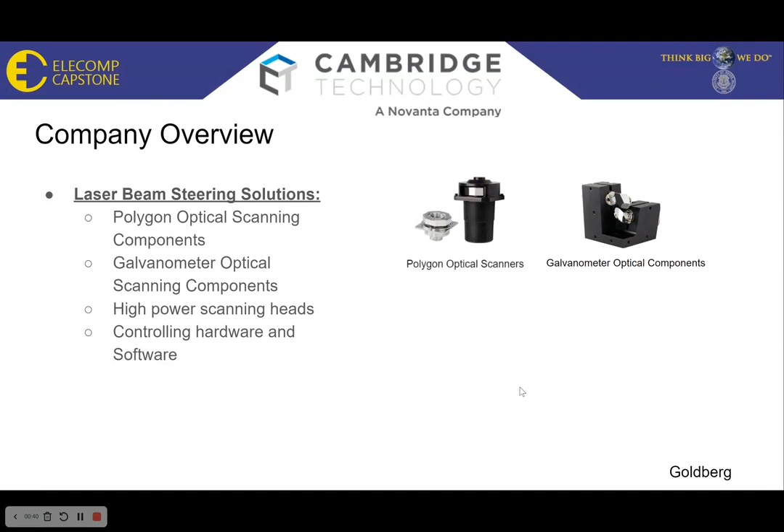Now, a little bit about Cambridge Technologies. Cambridge Technologies designs and manufactures cutting-edge laser beam steering solutions. These include polygon optical scanners, galvanometer optical components, high-powered scanning heads, and finally, controlling hardware and software.

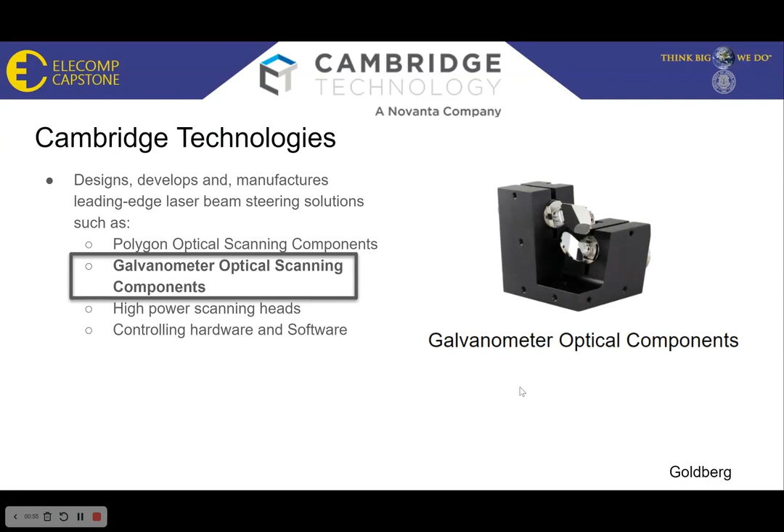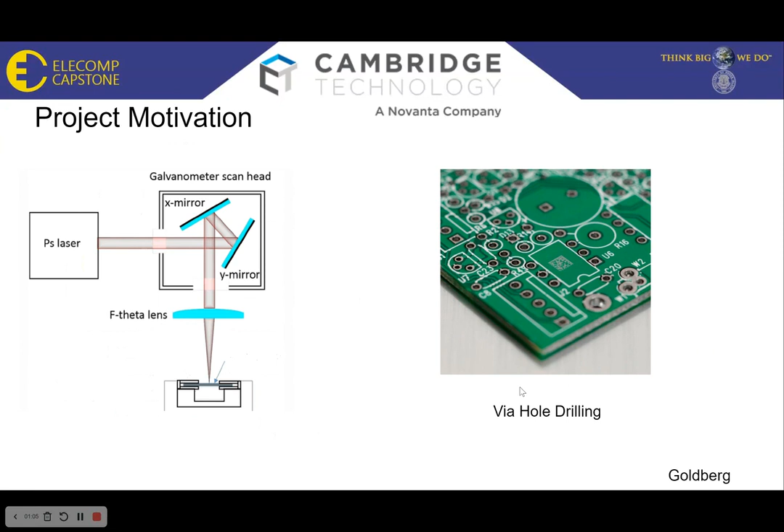Now, for our project specifically, we're going to be focused on Cambridge Technologies' highly engineered line of galvanometers. These galvanometers are built around a highly optimized moving magnet rotor, making Novanta the industry leader for these components. Now, these are some of the uses for high-powered galvanometers, such as via-hole drilling and high-speed marking and engraving.

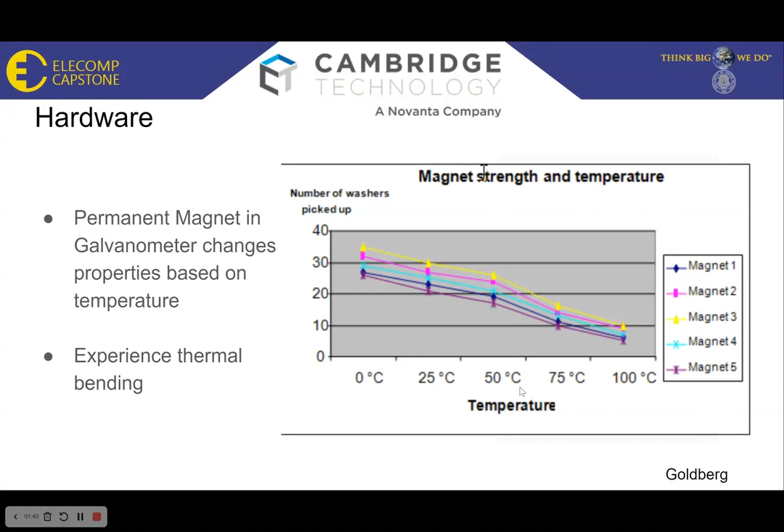Now, we know how a galvanometer works, but you might be wondering, how does this relate to our project? As we learned earlier, galvanometers rely on this magnetic field, specifically a permanent magnet, which begins to change properties at high temperatures. As Cambridge Technologies works on progressing their technology and making these galvanometers faster, temperature becomes a problem. For the hardware side of our project, we'll be making a complete test bench to ensure the quality of our magnet, using lasers to measure the tri-dimensional bending under high temperatures.

Okay, for our anticipated best outcome, this project has not been achieved, and the purpose for this outcome is that there will be two manufacturing operations, essentially a test measuring device and an input device that needs to be integrated into the MES system. The input device would upload the data into the electronic traveler so it can save the result from its procedure.

In addition to this outcome, it requires having the devices robust in a production environment, having the HMIs, or human machine interfaces, accessible through the MES UI environment with instructions and support for the operator, and it may require minimum user training to get used to the operation of the system.

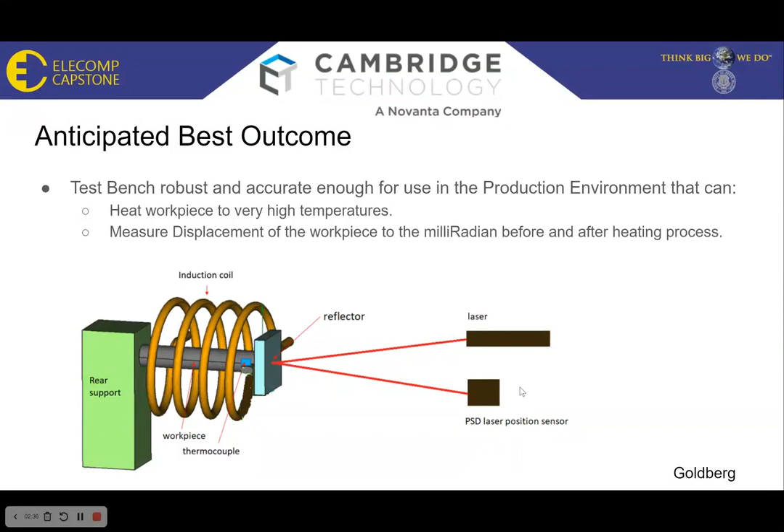This flowchart represents the operation of the testing structure. It starts with loading the workpiece. Once it is loaded, it needs to be aligned to the laser so the laser can be detected on a sensor to measure its X and Y position. Finally, the heating cycle will begin by heating the workpiece and then letting it cool off after gaining enough data.

And a sample time is a period to heat the workpiece so its temperature can reach the set point temperature of 100 degrees Celsius. Once the heating cycle is completed, the workpiece can be removed and its testing procedure is completed.

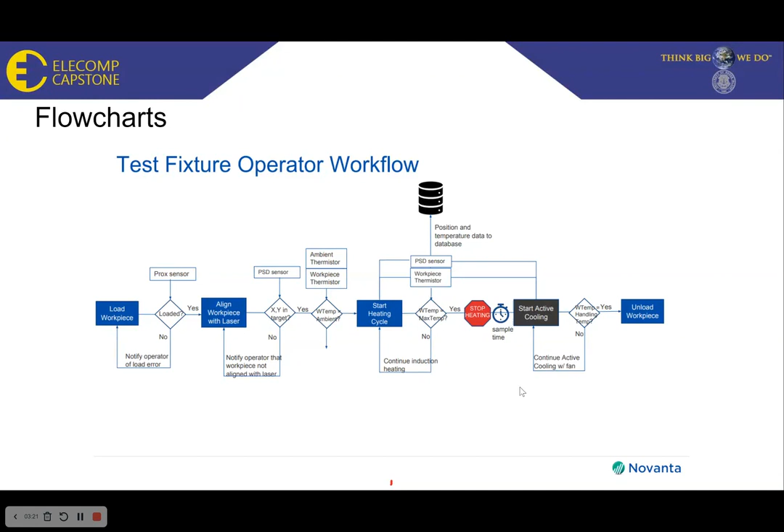To understand a little more of how the hardware works based on the flowchart we talked about earlier, the laser diode will emit the laser and a mirror is attached to the workpiece so it can reflect the laser, and the laser will travel to the PSD sensor to measure its position, and its data will be transmitted to the MES workstation.

The other device that is also connected to the workstation is a thermocouple, which will measure the workpiece temperature. With the temperature and the position data collected, it will be compiled to the database, and the induction heater will require a switch to control its power so the workpiece will not be overheated during the heating cycle.

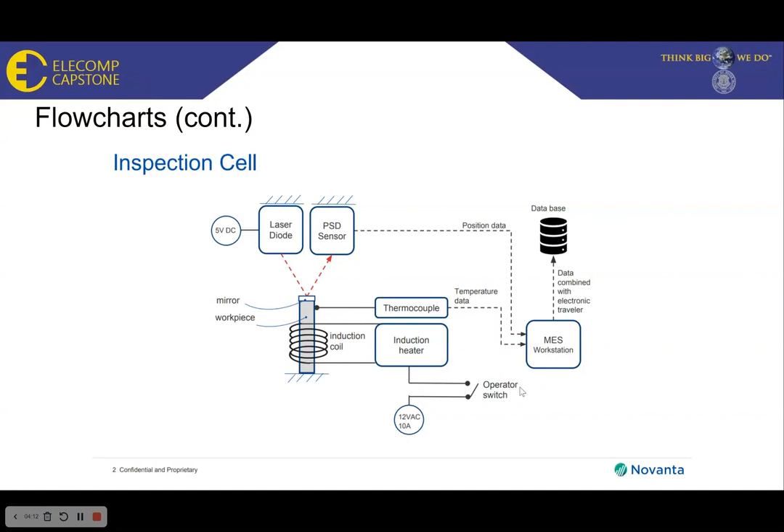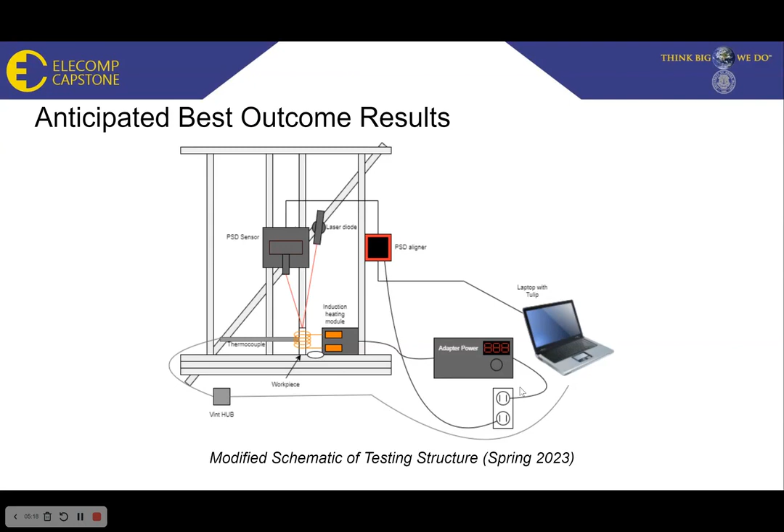The thermocouple is close to the heated workpiece so it can measure its temperature due to correlation when adding an insulator midway of the workpiece. The power adapter is the source of powering the induction heater, and it has a knob so it can adjust its voltage, well, it needs to be powered at its maximum for its fast heating rate. And the laptop itself contains the workstation, so it can use the Tulip program to upload the position and temperature data of the workpiece.

And finally, on these two images, we have a comparison of the testing structure we accomplished back in fall and later this spring. On the original structure, on the left, we built it with integration to only the PSD sensor and the laser diode. In the next image, we made more accomplishments to modify the structure, integrating other components so we could develop the heating cycle and measure its data on the workpiece.

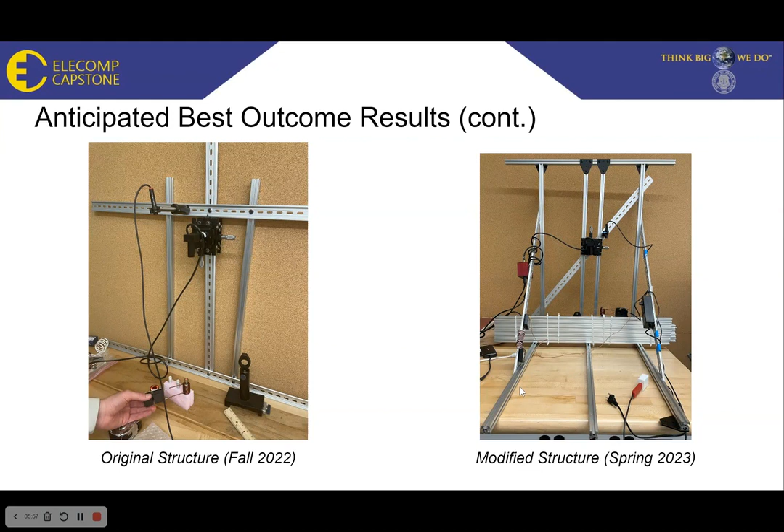So moving on to the software side, 80% of traditional manufacturing systems use paper trails to record data. We all know big stacks of paper can get out of control quickly. Not only is it unorganized, but there's no streamlined method to analyze our data and ensure the quality of our products is consistent.

So for the software side of this project, we will be building an intelligent manufacturing execution system to go along with our test bench. This will be designed to gain versatility and to organize, control, and monitor processes in an easy and accessible way. With an MES system, we are able to streamline all of our processes and data into a database and use this information to implement better quality control, in addition to opening the door to machine learning.

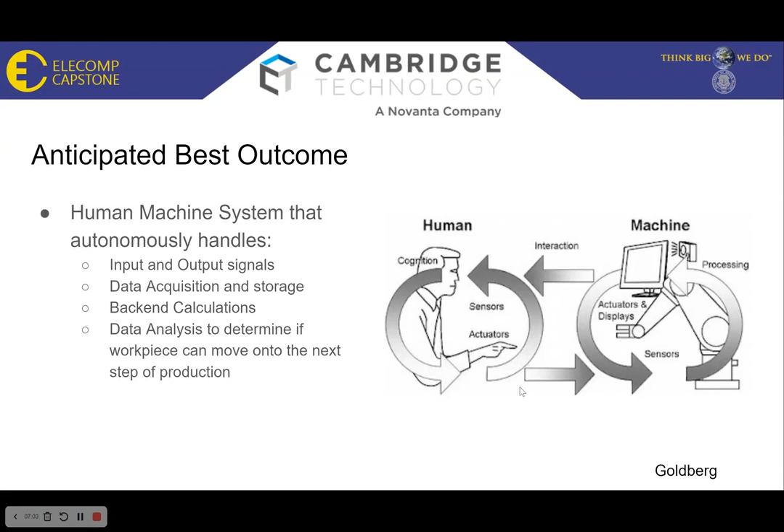So the first thing is the user will load the workpiece into the directed slot. We will be using the PSD sensor, which is just a positional sensor that tells you where a laser is. We will see if that's zeroed out to begin with, and then if it is, we will begin our heating process.

And throughout the heating process, we're taking data every second. We're taking our X position, Y position of data, and at the end, we'll be able to use all of these calculations to calculate different magnitudes and see how the position has changed over time.

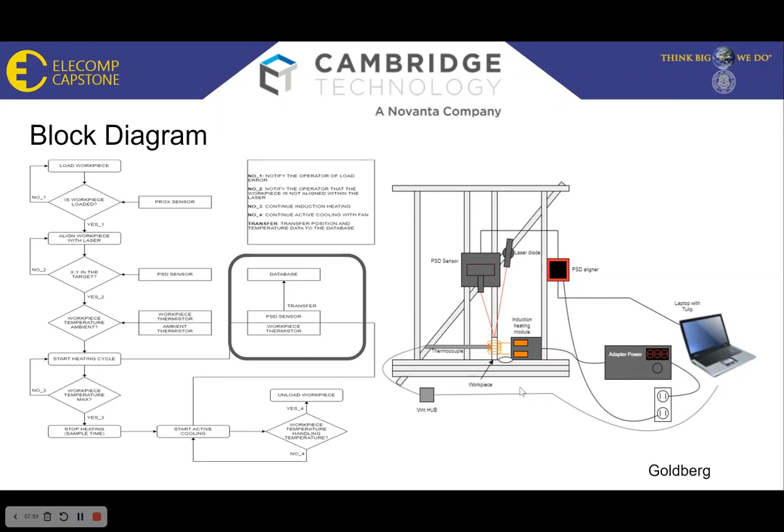And from there, we can make our calculations and upload them to a database, in addition to a user interface, as we'll see here. So for our project, we're trying to take this process and make it super automatic to allow an operator with minimal training to be able to operate it.

So once our user selects begin, all the necessary calculations will be done on the back end, eliminating the need for a technical background to operate this.

Another key feature that we have is an authentication system that creates a security wall for the operator. This uses the badge number, which will get matched to the corresponding logged in user, and either deny or allow based on the records.

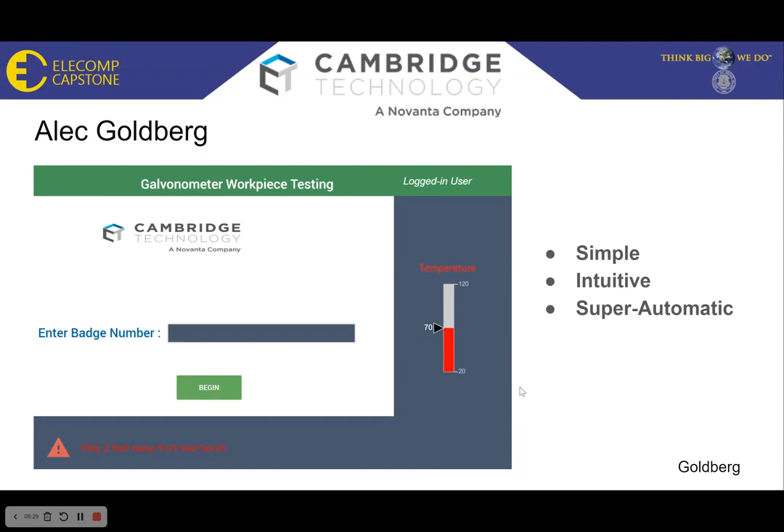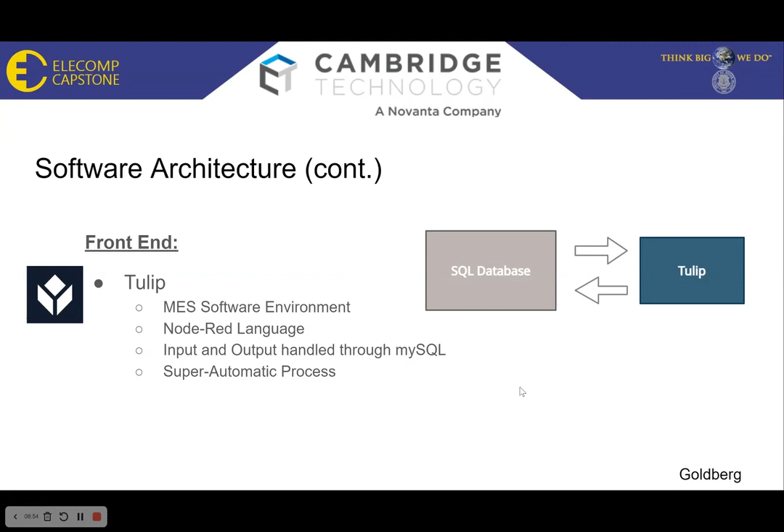Now, to program this HMI, we have been given a manufacturing execution system software, which uses a Node-RED programming language for all the user graphics. As mentioned earlier, 90% of our data flow and calculations are handled on the back end. However, we still need the signal to begin the program, in addition to sending data back and forth, such as the final calculations, serial numbers of the product, user info, and much more.

So now for the meat of our project. We're using a variety of sensors to get all of our necessary information. This includes a thermocouple, PSD sensor, a PID controller, and for the backend, we're actually using Python as our main programming language, where we perform all of our data acquisition.

To begin, we are taking an initial PSD sensor reading to realize the initial position of our workpiece. We then send a signal to our induction heater to turn on. Our thermocouple is an indicator for when the workpiece reaches the desired temperature, and then we can begin taking values.

This gives us X and Y values, and then using the displacement of the values, we can calculate the change in magnitude, the minimum magnitude, and the maximum magnitude. This tells us how much our workpiece has moved, and if it has bent too much, it can't move on into the next step of the manufacturing line.

And throughout each step, we're storing all the data into a time series SQL database. This allows us to retrieve values at desired timestamps, eliminating excess data. In addition, each data point is correlated with the serial number, so an operator can always go back and look at the data for each serial number.

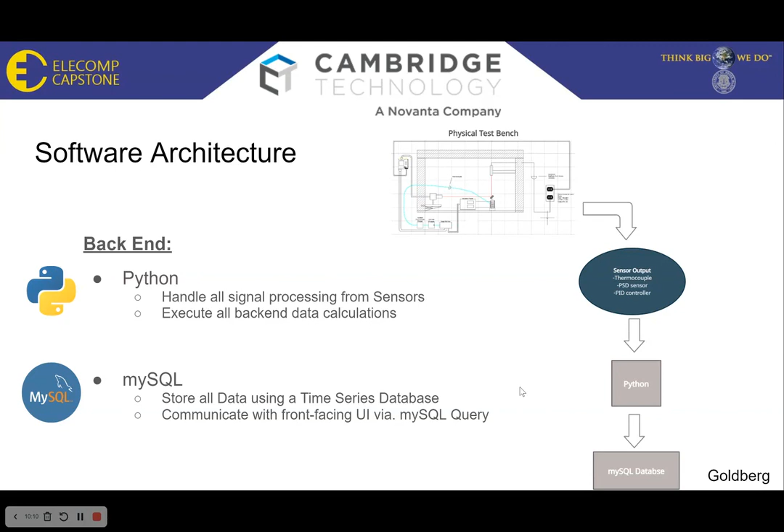Now here we can see an overall full process. Once again, we can see that the operator is going to enter the serial number of the workpiece and hit enter. This signal is sent to our backend, which cross-checks the validity of the serial number against the database of products. Then we can start taking our readings.

But first we need to make sure that our workpiece is in range of the sensor, meaning that our workpiece is in the right place and ready to go. If this is true, we begin our process, which turns the induction heater on, and we collect all the data.

As soon as we hit our desired temperature, whether it's 80 degrees or 100 degrees Celsius, we can cross-check the minimum, maximum, and change in magnitude and display this on the user interface. In addition, we generate a highly detailed visualization in which each of the spikes will notify the user whether there have been issues or what sort of pattern is going on with the workpiece.

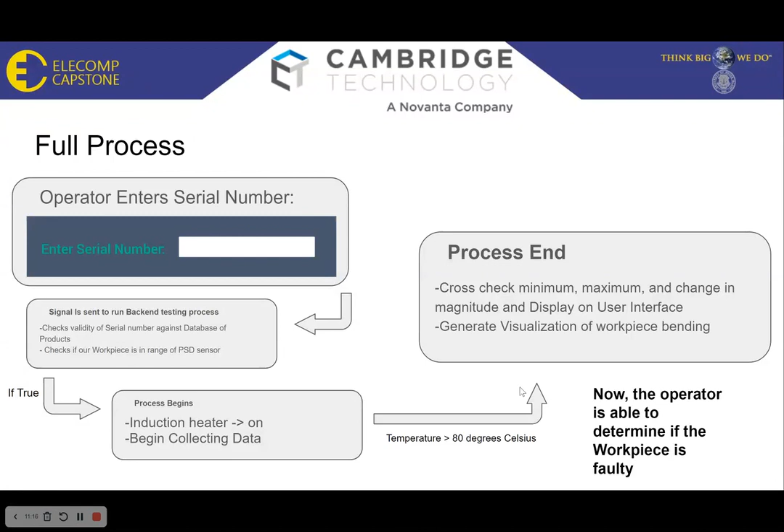Now, from there, the operator is able to determine if the workpiece is faulty.

For the presentations I have accomplished on the hardware side, I have performed multiple tests to develop the heating cycle, which requires only the power adapter. The temperature measurements are correlated when measuring temperature in three different areas, with an insulator placed between the workpiece.

One measurement is on top and one on the bottom, along with the induction coil itself. The components have been adjusted to allow the workpiece and the laser to be aligned for the PSD sensor. The thermocouple's position has also been adjusted so we'll be able to get good accuracy for the temperature on the workpiece.

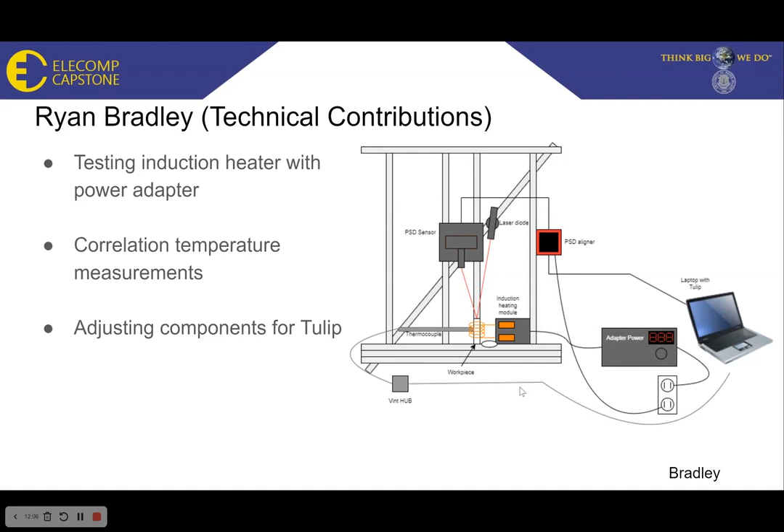For further information on how the hardware really works: the induction heater has been integrated with the power adapter, and it needs to be adjusted up to its maximum voltage. The maximum voltage is about 12 volts, which allows the induction heater to have the highest heating rate to heat the workpiece.

While automation cannot control its power for this process, the voltage will reach its maximum when you adjust the knob on the power adapter.

This is integrated with the power adapter so it can alert that the induction heater is activated.

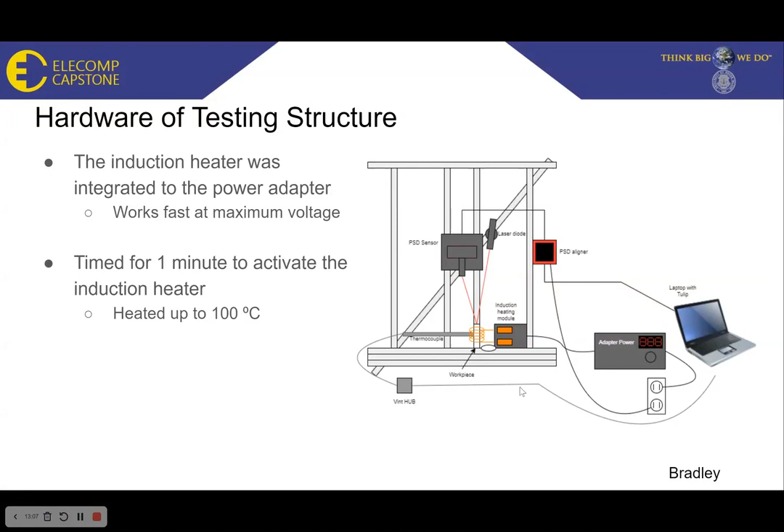As we mentioned earlier, there are two different components connected to the workstation, so we can pick up measurements on the workpiece position and temperature.

Both of these devices have already been integrated into the testing structure, while the laser diode and the workpiece are aligned with each other so we get accurate readings for the workpiece position.

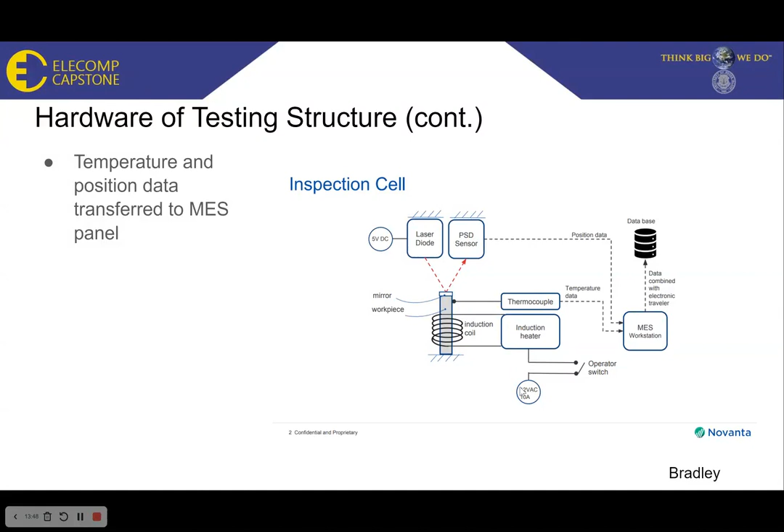We were unable to integrate a cooling fan into the structure, so it takes time to allow all the equipment, including the workpiece itself, to cool off — I'd say at least 5 minutes.

So, in conclusion, throughout this year we've been able to accomplish a lot. Although we didn't completely achieve our anticipated best outcome — which in our case means our testing structure was just not ready for the production environment.

However, what we have been able to accomplish is a fully automated testing process for an operator with the user interface we mentioned earlier. We are able to record and process all of the data within the temperature range, and finally calculate the final results to determine the quality of the workpiece.

On the hardware side, we're able to find the correlation of temperature measurements with the induction heater to get accurate measurements, in addition to adjusting components for Tulip and testing hardware with only a power adapter.